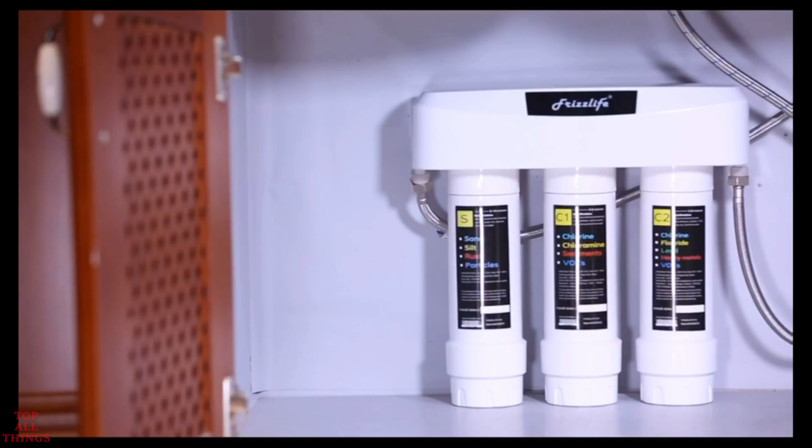FrizzLife SK99 is extremely easy to install. If you want to mount it on a wooden surface, you just mount the two screws with a distance of 3.8 inches between. FrizzLife doesn't recommend you mount the system if your sink is too narrow to work with.

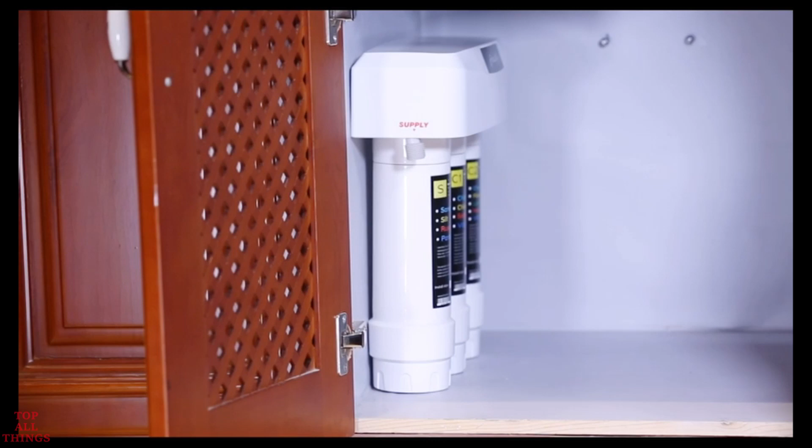Connect the inlet hose to the system where it is labeled supply. Make sure the rubber O-ring is inside. Shut off your water supply. Remove the existing water hose and connect the other end of the inlet hose to the valve.

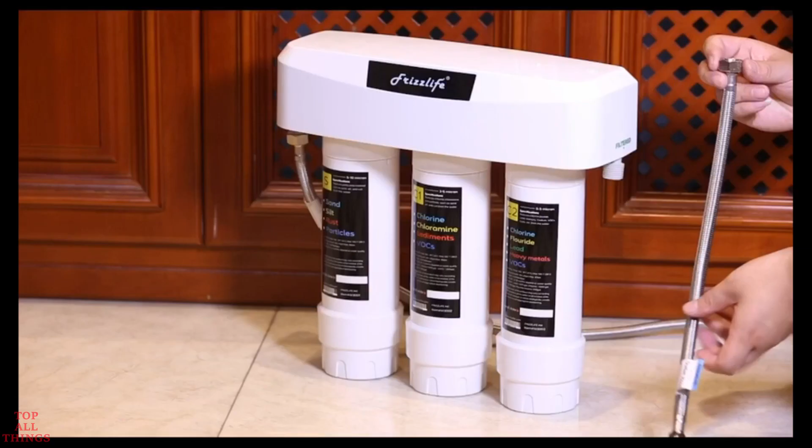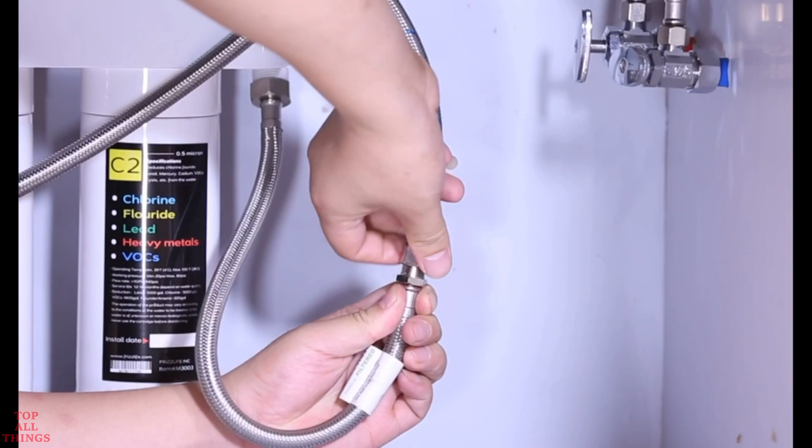Then connect the outlet hose to the system where it is labeled filtered. Make sure the rubber O-ring is inside. Connect the other end of the outlet hose to the hose you just removed from the feed water valve. Hand tighten, and make sure the rubber O-ring is inside.

After the connection is complete, turn on the water supply and check for leaks, and open the tap and run water through the filter for 3 to 5 minutes before use.

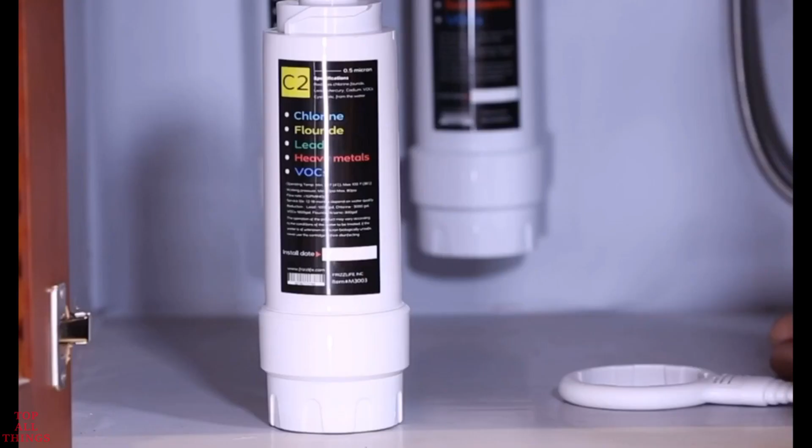Filter cartridge replacement is also very easy. It's important that you shut off the water supply first, then replace the filter cartridges. Shut off the water supply and twist off the filter cartridge container, and use the wrench to turn counterclockwise to unscrew the bottom cap of the container.

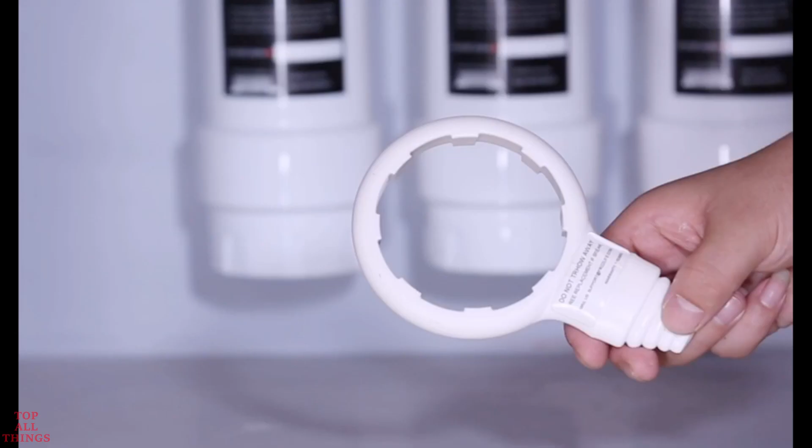Replace the inside cartridge with a new one. The wrench is needed whenever replacing the filter cartridge. If it is broken or lost, please contact us to get a new wrench.

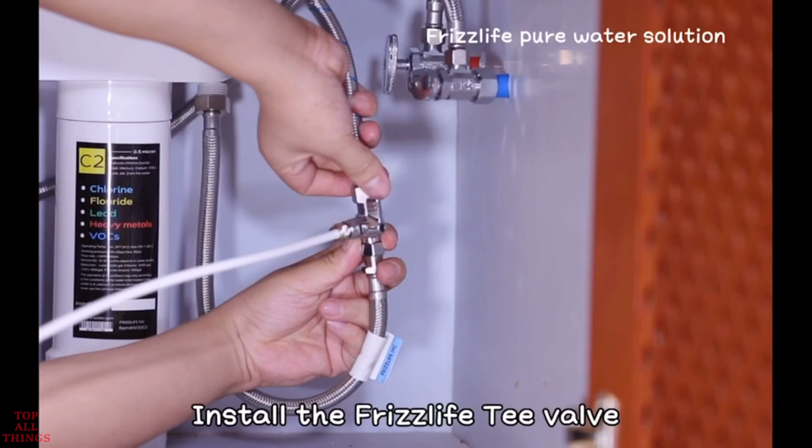If you want your refrigerator or ice maker to also have pure water from SK99, FrizzLife also has the ice maker kit available. Just search FrizzLife Ice Maker Kit.

If your sink is too narrow or you don't have much space, we would suggest you go with our MP99 or MK99 single-stage water filter system. Please feel free to contact us anytime if you encounter any problems during installation or usage.

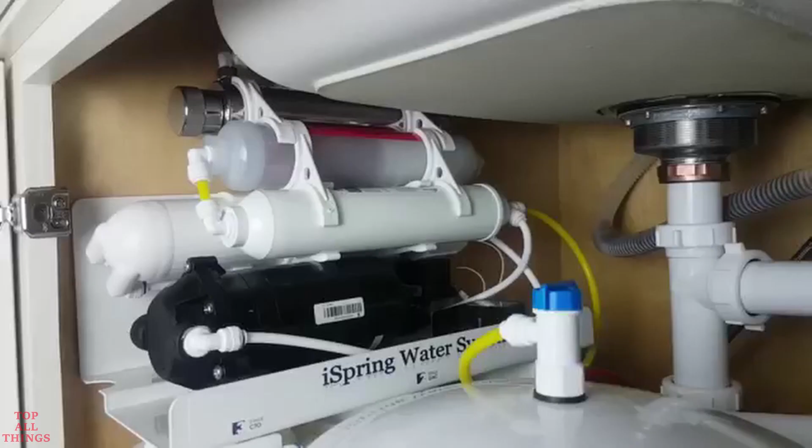This system produces about twice as much water as other systems we've had. I've had this system installed for a little bit over a year now. And, to be honest, when the pump is running, you don't even know it's running. It's so quiet.

Not only that, but this system is so much more cost efficient than the other models we've purchased. We've actually had a neighbor install the system just last month. And not only that, but my wife and I bought 2 early Christmas presents for relatives in the family. So it's really great.

Thinking about getting an RO system for your home or office? Don't get stuck with an old-style canister RO system fraught with problems. The HomeMaster Artesian Full Contact Reverse Osmosis System solves the 4 main problems associated with traditional RO systems.

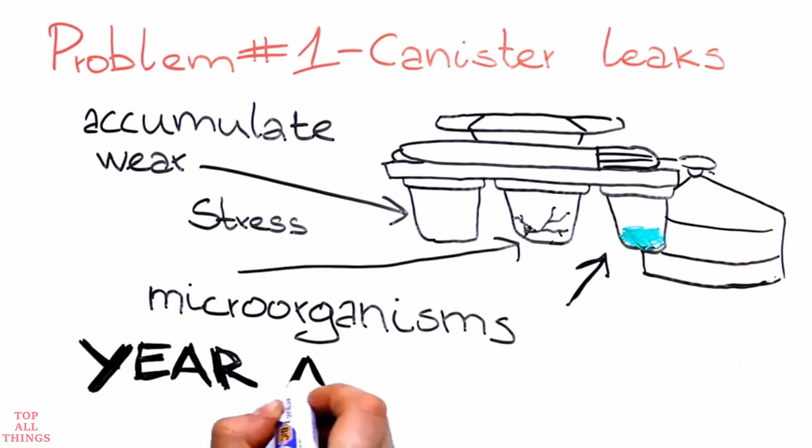Problem number 1, canister leaks. Canister filter housings accumulate wear, stress, and microorganisms year after year. Only the filter element gets changed, not the filter housings. Those systems advise owners to change those housings every 5 years, but no one ever does until they leak or burst, causing a flood. HomeMaster system employs advanced modular filters where the filter and filter housing are all in one and changed annually, thus virtually eliminating this problem. You also create a more hygienic system by changing the housings more frequently.

Problem number 2, slow flow. The slow flow from the traditional RO faucet is caused by their smaller fittings and tubing. This leads to less use as you become frustrated with wasting your valuable time.

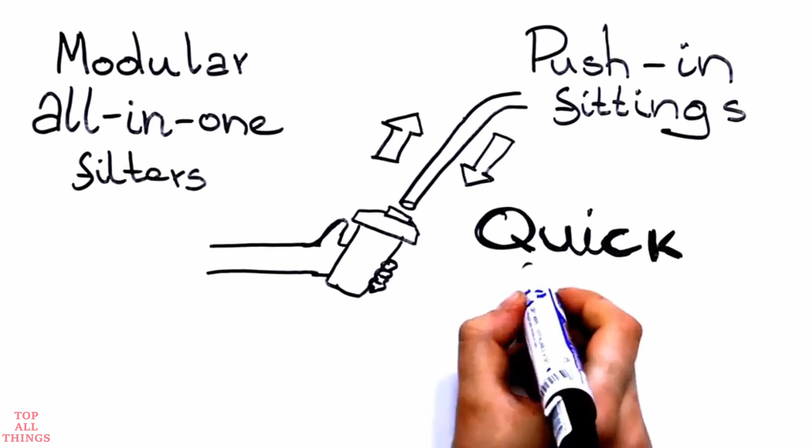Problem number 3, service challenges. Hardness minerals and other icky contaminants often seal canister housings shut, requiring superhuman strength to open them. HomeMaster uses modular all-in-one filters with push-in fittings to make service quick and easy. No bodybuilders or wrenches required. Don't get frustrated. Get the HomeMaster.

Problem number 4, acidic water. Water produced by reverse osmosis is pure, so why do all those traditional RO systems use a post filter? Answer: the highly pure but acidic water produced by the RO membrane sits in the rubber bladder storage tank, dissolves some of the rubber, and repollutes the water, thus creating the need for the post filter to then remove the rubber.

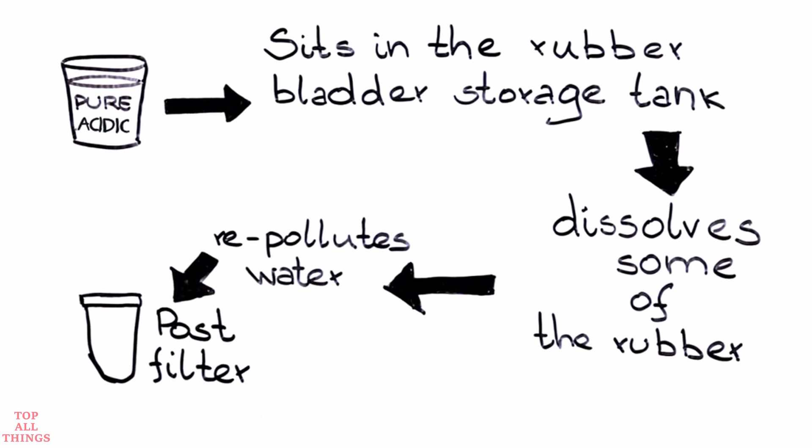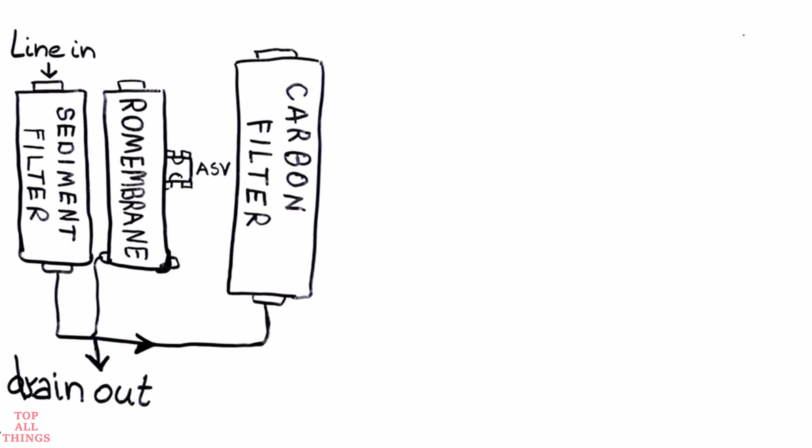Our one-of-a-kind patented full-contact technology forces the highly pure but acidic RO water through a remineralization filter not only once but twice - once on the way to the storage tank and once again on the way to the RO faucet - adding only calcium and magnesium minerals derived from crushed marble. It's an entirely natural process. The results are less storage tank degradation and cleaner, healthier, better-tasting water that is slightly alkaline.

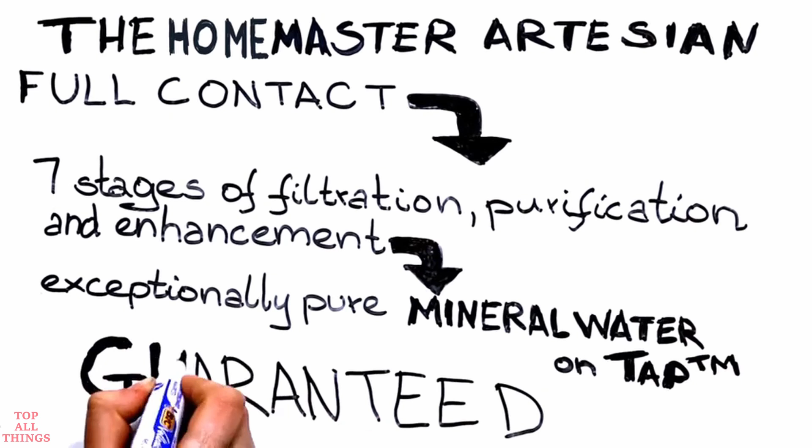With 7 stages of filtration, purification, and enhancement, the HomeMaster Artesian Full Contact produces exceptionally pure mineral water on tap. Guaranteed or your money back. The HomeMaster Artesian Full Contact from Perfect Water Technologies. Order today.

We're going to walk you through the installation of your new reverse osmosis system. Installing fresh, clean drinking water in your home is easy. For setup, we've included a faucet, all the filters you need, and a tank.

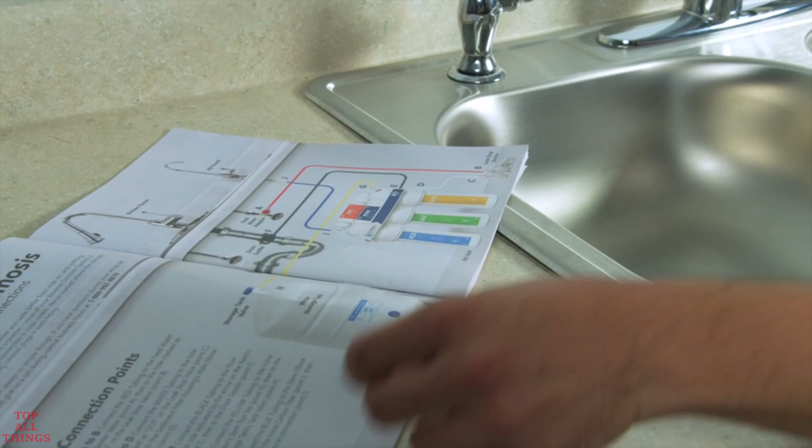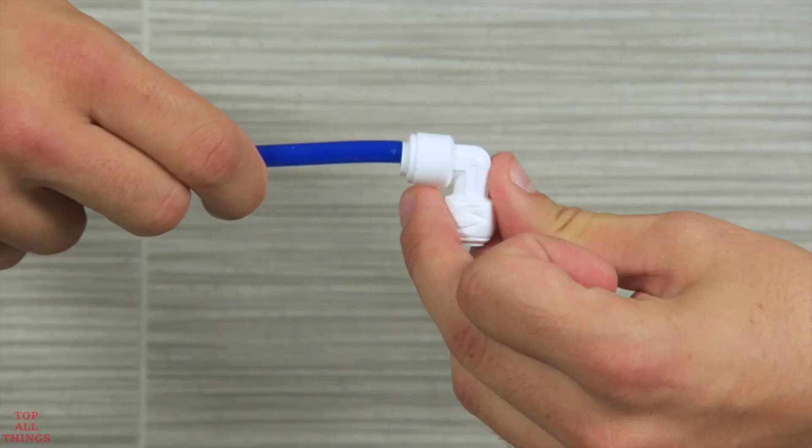To connect tubing, push the tube into the fitting, straight and level with the collet. The collet is the small moving piece at the end of the fitting. The tubing will go 5/8 of an inch into the collet before the lock is activated. Pull on the tube to make sure the lock has activated.

Once the tubing is locked, use a locking clip to secure the connection by sliding the open end of the clip between the collet and fitting.

To remove a tube, first remove the locking clip. Just pull the clip away from the connection. Then, hold the collet down while pulling out on the tube.

Some system fittings have color-coded plugs you will need to remove before you connect tubing. You remove them the same way.

Before cutting any tubing, make sure you know the final length you need. Cuts should be made with a razor blade against a flat surface. Your cut must be straight or your tubing may leak and will need to be cut again.

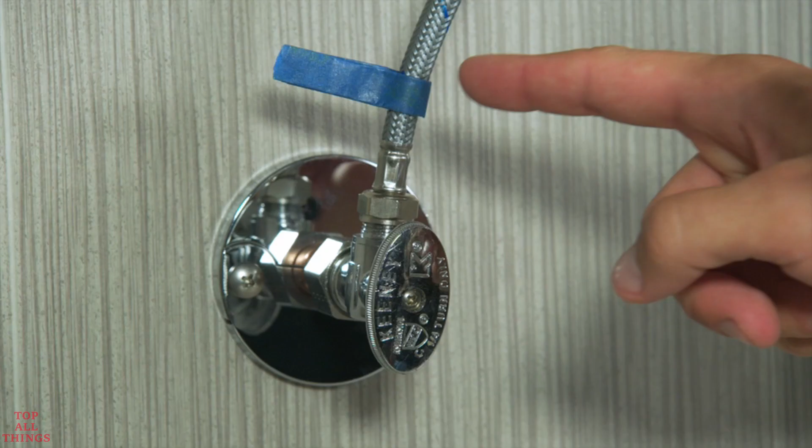Find your cold water supply and turn it off completely. If you have a single handle faucet, turn off your hot water valve. Release any pressure by opening the cold water flow on your sink.

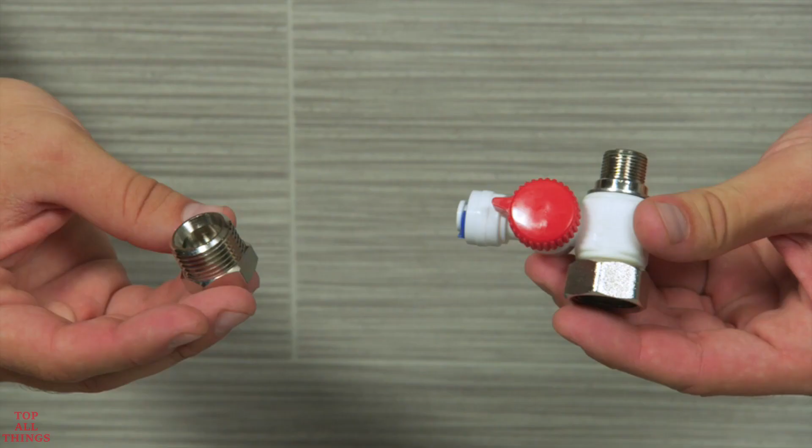The feed adapter can be used for 3/8 or 1/2 inch plumbing sizes. For 3/8 inch connections, attach the adapter nut like so.

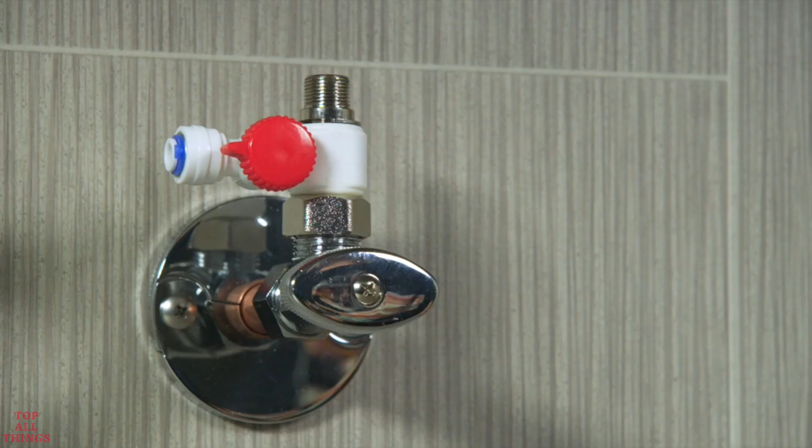For 1/2 inch connections, attach the adapter nut on the opposite side. You can secure the adapter valve either directly to the cold water valve or further up the line.

Keep the feed adapter in the closed position until installation is finished. Secure the feed adapter with your adjustable wrench.

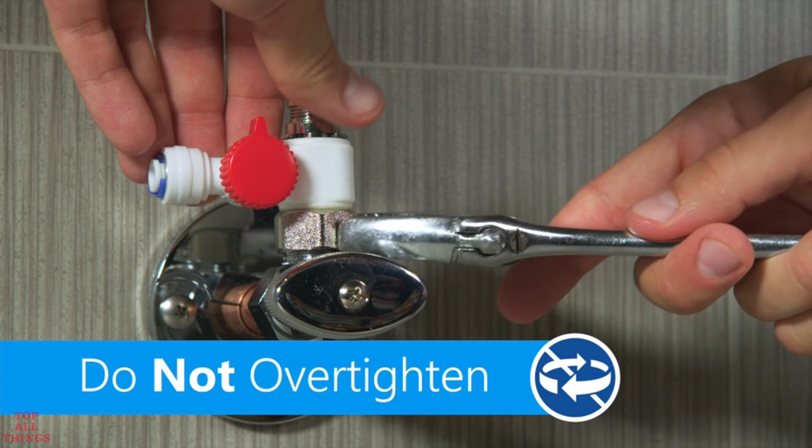Use the proper drill bit and drilling method for the material you're drilling. Porcelain or granite may need special drill bits.

First, find a good location for your RO faucet. Any flat surface where drilling a hole will not damage pipes or wiring will work.

Use your power drill and 1/2 inch drill bit to make a hole for your RO faucet. You can also use an existing hole of the appropriate size.

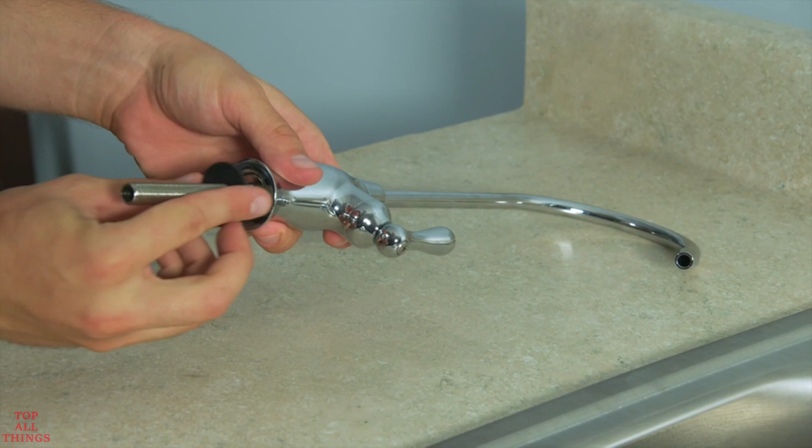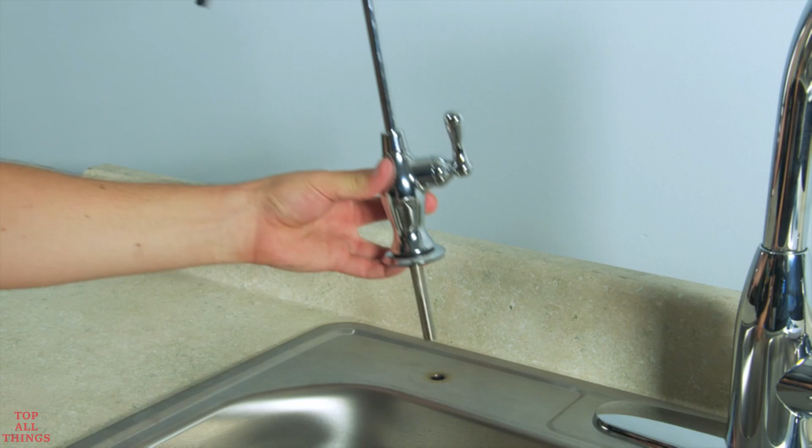Put the small rubber washer, the base plate, then the large rubber washer through the stem to the base of the faucet. Then put the faucet stem through the hole. Make sure your faucet sits in the middle of the hole.

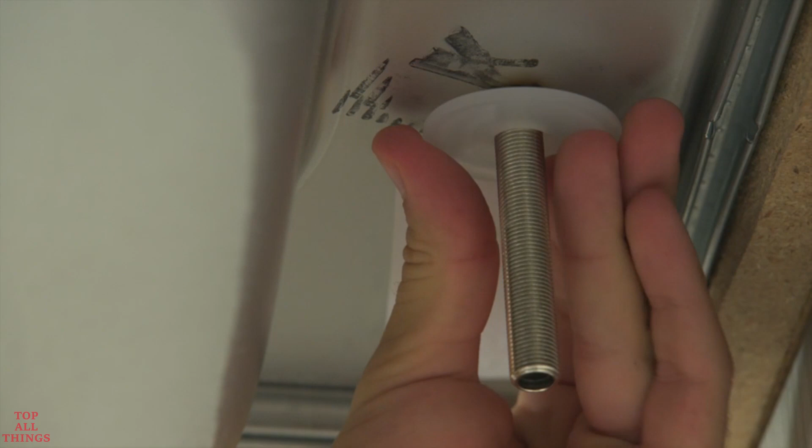Under the counter, put the plastic washer, lock washer, then hex nut onto the stem. Make sure they are secured all the way to the top.

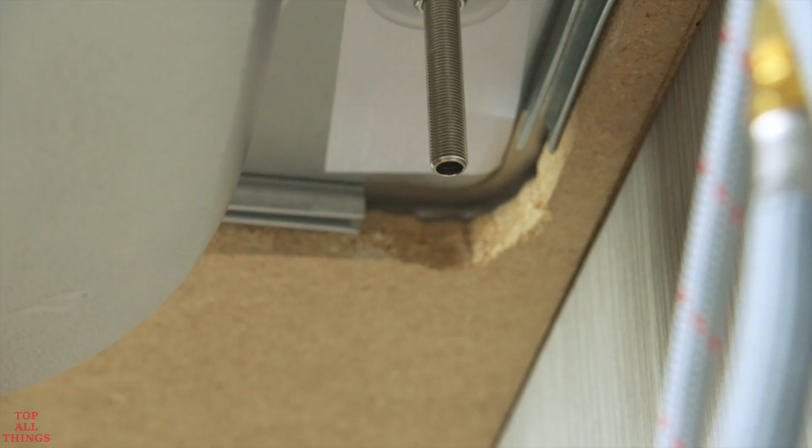Take your 1/4 inch blue tubing and push the faucet adapter onto the tube. Tighten the faucet adapter onto the faucet stem.

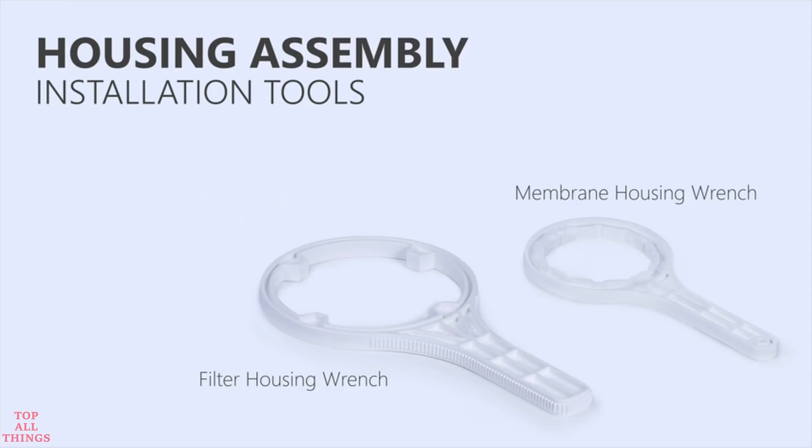Take the top part of the system and tighten the membrane housing cap by hand, or with your smaller housing wrench.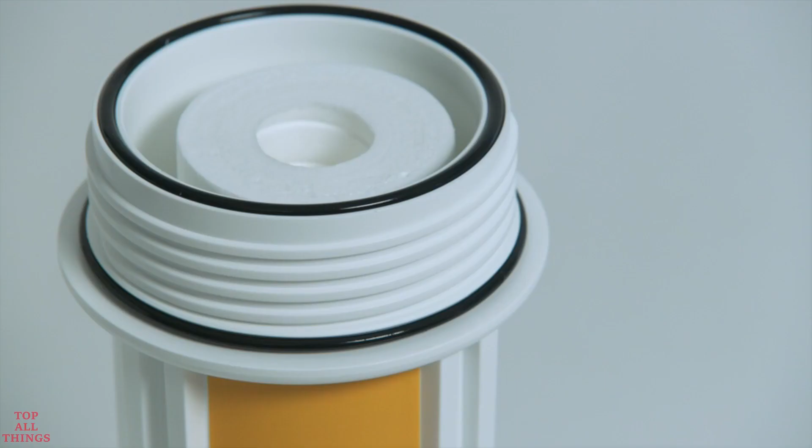Stand the filter housings in the correct order. Look to make sure that the O-rings are in place on each housing.

Attach the bottom filters to the top of the system by hand. Then tighten the housing with your large filter housing wrench.

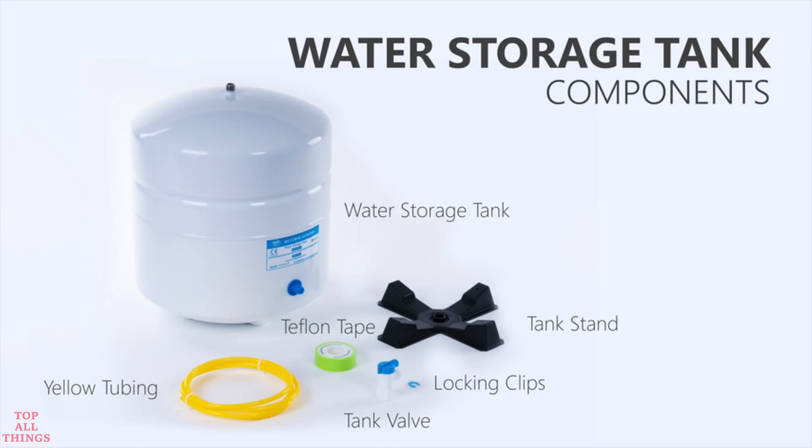Wrap the stem on the tank with 8 to 10 layers of Teflon tape. Then screw the tank valve onto the stem.

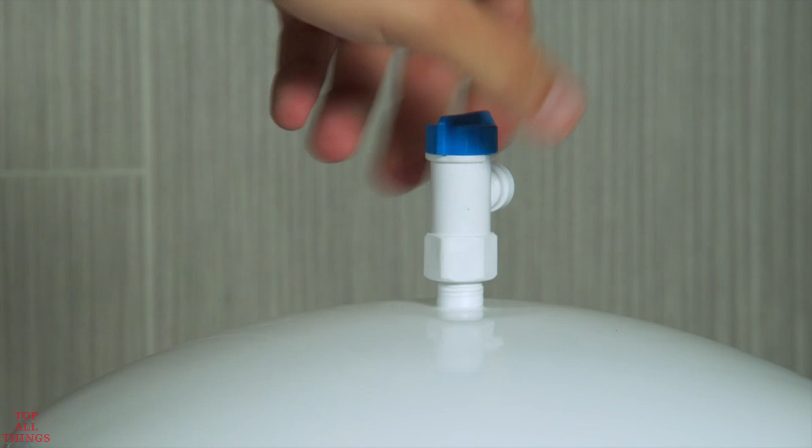Place the tank in the desired location. It can sit upright or on its side.

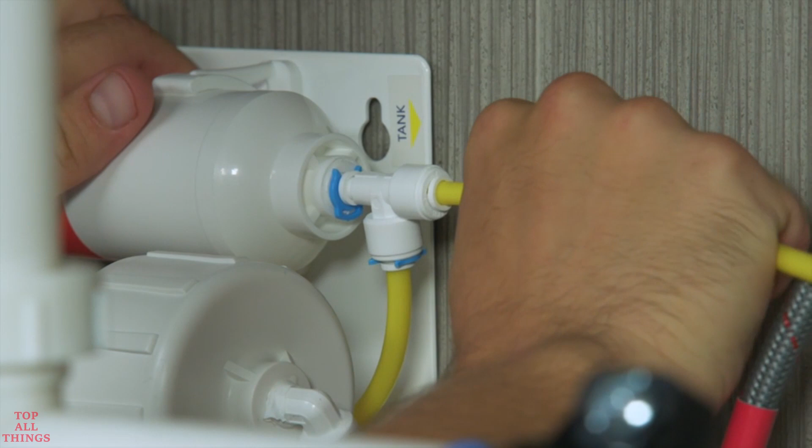Connect the yellow tubing to the PAC filter on the system. Then connect the yellow tubing to the tank valve.

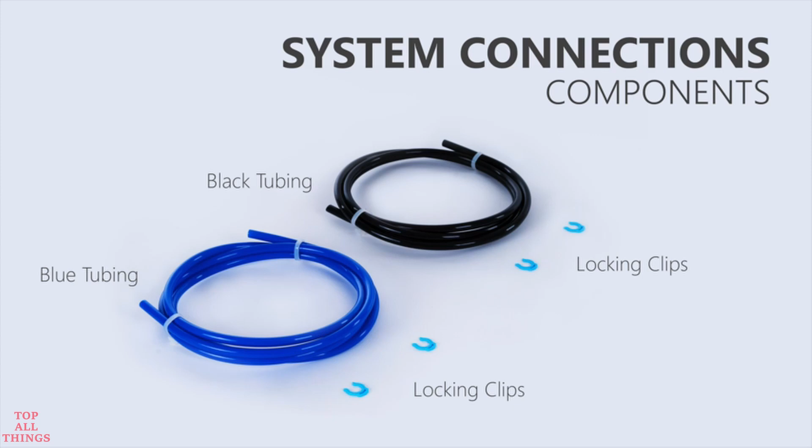Connect the black tubing to the flow restrictor. Then connect the black tubing to the drain saddle.

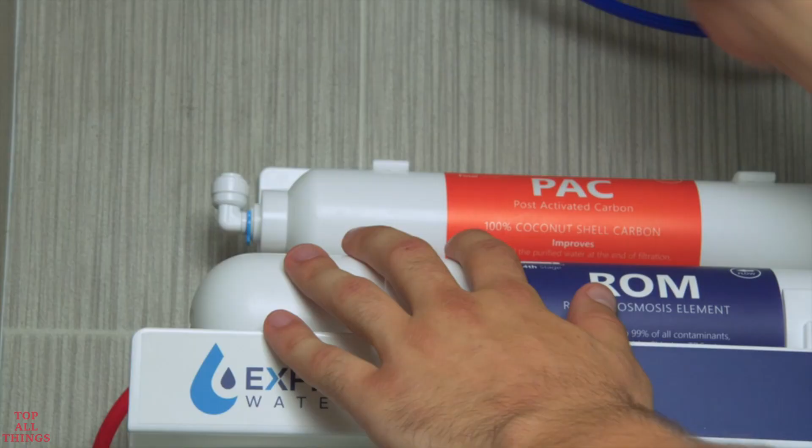Connect the blue tubing from the RO faucet to the PAC filter. You should have completed the other connections earlier in the video. Make sure all connections are complete and secure before moving on.

Make sure the tank valve is closed. Then open the cold water valve and feed adapter valve. Turn on the RO faucet and wait up to 10 minutes for water to start dripping.

Let the water flow for 5 minutes. Then turn the faucet off. Wait 10 minutes and check the system for leaks.

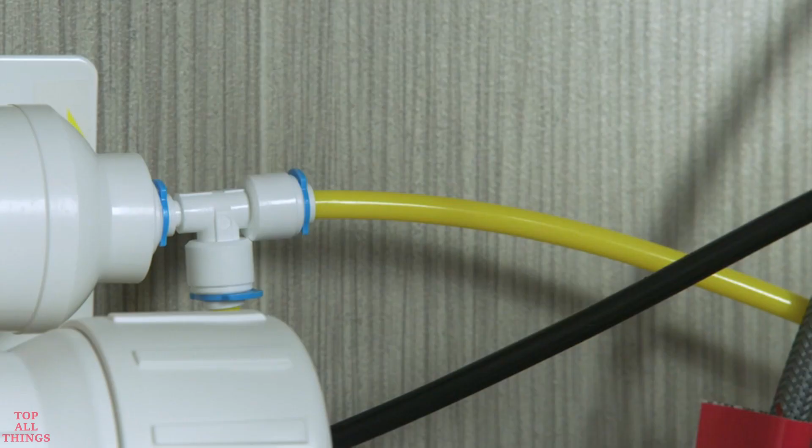If you find a leak, turn the feed water adapter valve off and open the RO faucet to release pressure. Make sure the tubing at the leaking connection point is fully secured and cut correctly. Pressurize the system once you have identified the problem.

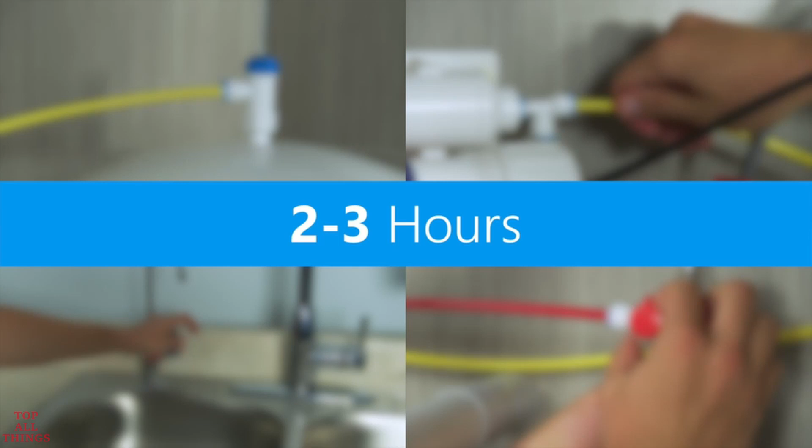Once you're sure there are no immediate leaks, turn the tank valve to the open position and allow the tank to fill completely. This will take between 2 and 3 hours. The amount of time depends on the pressure and quality of your incoming water.

The flow of water will stop once the tank is filled. When the tank is full, open your RO faucet and drain the stored water. Once the water flow has slowed to a trickle, close the faucet and allow the tank to fill again.

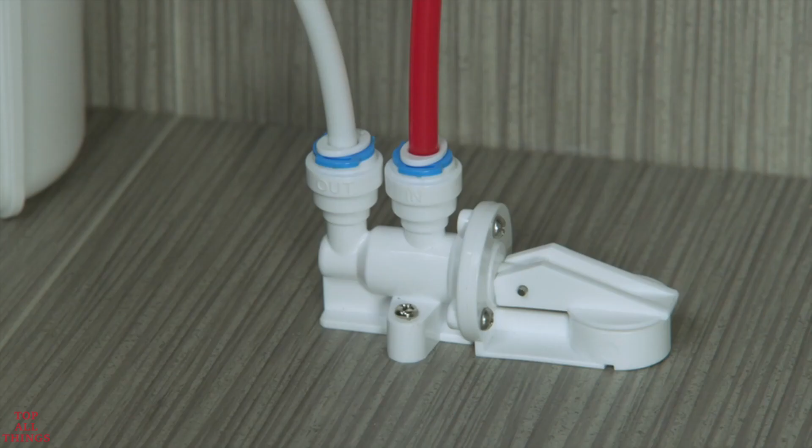You should empty 2 more tanks of water to flush your system and prime your filters. This will take 4 to 6 hours. Occasionally check for leaks as you fill and empty the system.

Now, let the system fill one final time and sit overnight before you flush again. Once the next tank is filled, your water is ready for drinking. Check for leaks occasionally during the first week of use.

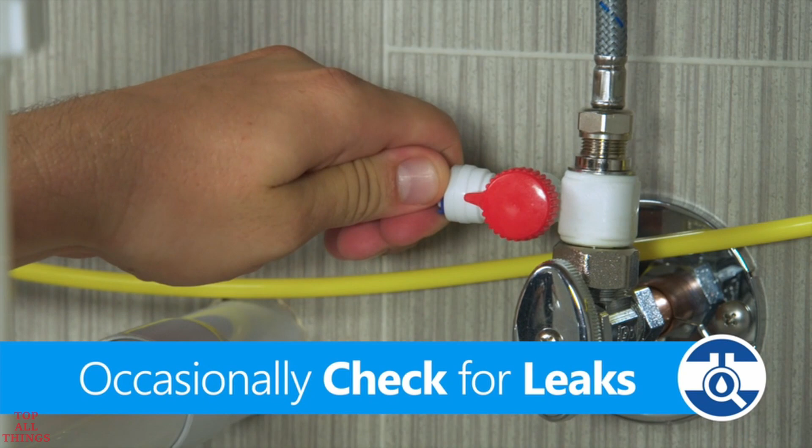Now your RO system is ready to go and you're ready to enjoy safe, clean drinking water made in your own home.